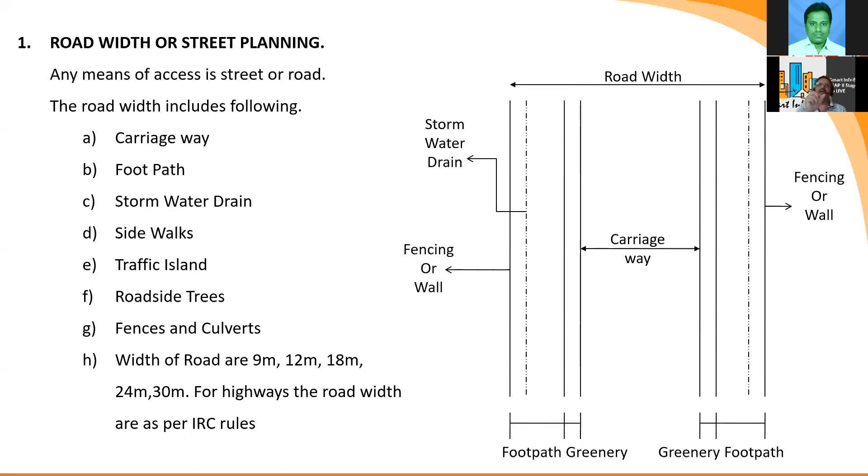And setbacks depend on this building height.

Any construction we do, buildings particularly, are for human occupancy. So air, lighting, ventilation, water, and circulation of fresh air are important. Particularly with COVID, we are getting design briefs from clients saying that we want to reduce the usage of air conditioning, so provide us natural cross ventilation in the building. Though it was there all along, now people are realizing the importance of natural ventilation and antibacterial finishes. These are all very important things for engineers to consider from now on.

The orientation of the building is important as light and ventilation play an important role in our health. Each state or community has its own orientation rules because as we go south, and as we go north, the climatic conditions are different. So we should follow orientation and planning depending on the region. If we go to the northeast, there is more rainfall always, so we have to plan preferably sloped roofs, considering more rainfall and sometimes even snowfall in some regions. Considering this climatic condition, we decide the orientation of the building and the building roof system.

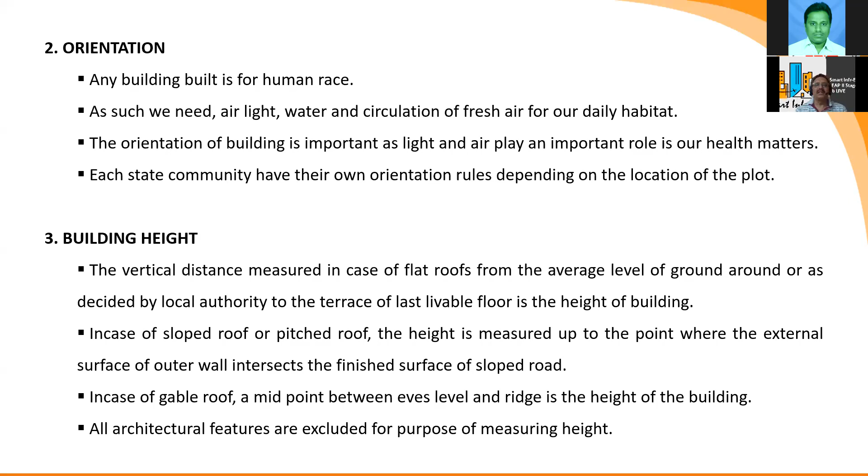All architectural features, that means parapet wall or facade, fascias, are all excluded from measuring the height. So this is the definition of building height.

And setbacks - setback is the distance between the property boundary and the building line. Somebody was asking me, in the setback, should we consider plaster, should we consider the balconies? Yes, definitely. So setback means it is a clear open space for the building.

So the next important thing is the floor area ratio. The definition of floor area ratio is the total covered area of all floors, excluding parking, excluding corridors, excluding balconies. It is called the floor area ratio - total covered area of all the floors, in other words, the plinth.

Let us take plinth area of the flats or commercial building and the total plot area. So if you have a FAR of 1.5, let's say in some corporations the limit of FAR is 1.5. If you have 1 acre of land, that is 43,560 square feet, with FAR 1.5 you add 43,560 plus 21,780, giving about 64,000 to 65,400 square feet as the built-up area you can build, plus common areas, balconies and all that.

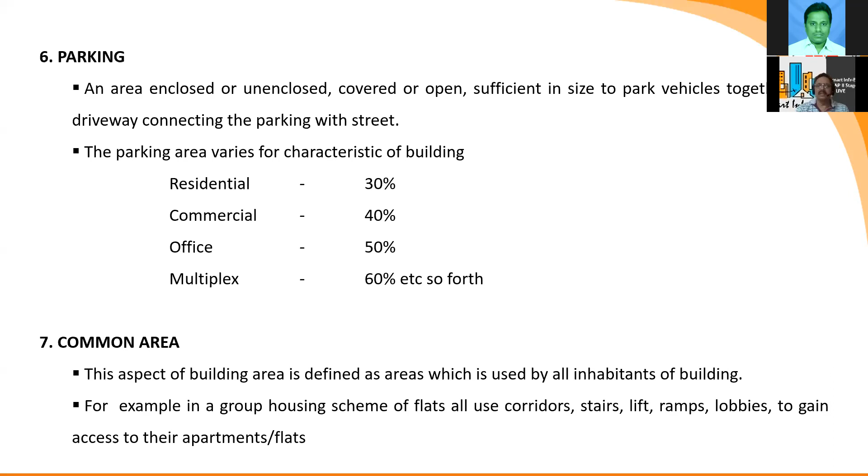But this 1 lakh square feet office space includes common areas, that is corridors, common lifts, elevators and escalators. The common area of each building type varies. For example, width of passage is 6 feet 6 inches for flats, about 2 meters, but for hospitals it is 10 feet, and in some larger areas we even provide 12 feet corridors. These are the bylaws.

Floor area ratio minimum starts with 1 in some areas, as per the bylaws, and goes up to 2 maximum. But in Telugu states, for example, there is no limit. I have come across in Kerala and Delhi certain provisions which allow up to 3 FAR also. So for every location of the building, we have to study the bylaws for that location.

Even in Hyderabad, we have different micro zones like Banjara Hills, with development control norms and regulations while giving permission for layout development. So for every area, we have to consider the DCR, development control regulations, or bylaws of that area. In Hyderabad itself we have HUDA, Hyderabad Urban Development Authority, HADA, Hyderabad Airport Development Authority, HMDA, Hyderabad Metropolitan Development Authority, and GHMC. So many regions have defined the DCR.

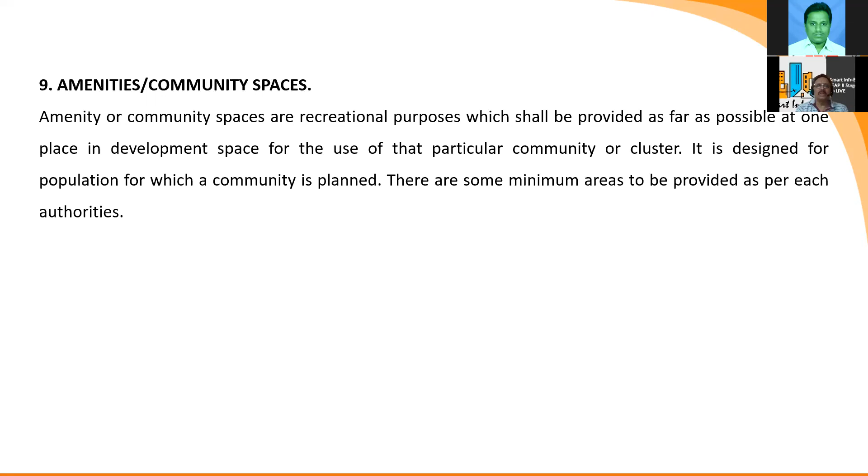For positioning and sizing, there are norms the National Building Code has defined for affordable housing also. So you have to refer to the NBC for the size of the rooms.

As per RERA, there is no restriction on limitation of common areas actually, but RERA only says you define the carpet area and you have to deliver that carpet area. You cannot reduce the carpet area that you define in your brochure. But for selling purposes, you can always discuss.

This is what I am trying to organize, to make developers follow a proper SOP. We have to educate both the people buying flats and those selling them, and discipline the sellers, because unless these two groups meet and agree, we cannot resolve this.

In fact, ideally, as an engineer, we always feel you can only measure the slab area. So measure the total slab area and divide by the number of flats, or divide with a weighted average of common areas. That should be the way we load the percentage of common area. But at present, this is not being followed strictly by everyone. Some bigger companies follow it, but down the line there is no transparency in declaring what the common area even is.

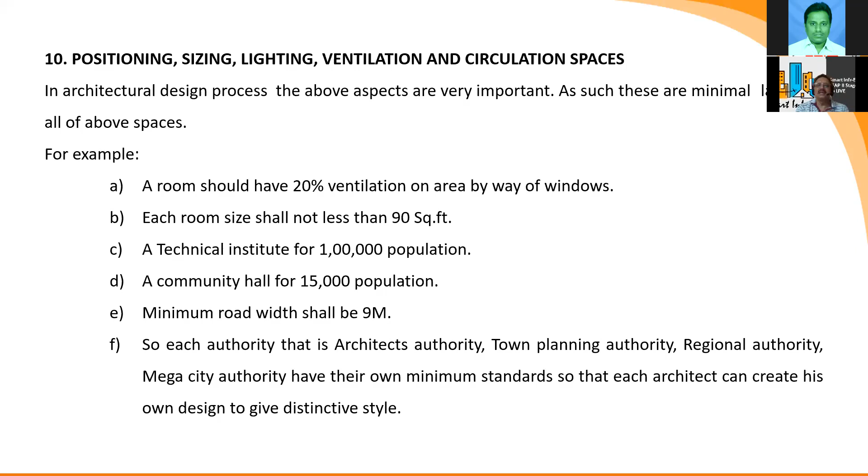Each room size should not be less than 90 square feet. In case of affordable housing, it is different. We have norms for a community hall for every 15,000 population, one technical institute for every 1 lakh population, and minimum road width shall be 9 meters. So this is the sizing of the plots and the sizing of the spaces.

Vastu, though many people think it's superstition, is in fact the civil engineering or architecture of those days, an ancient theory of planning and design of towns and even building planning. It gives certain discipline in planning and helps professionals reduce the number of options by following this theory. So it is sometimes good, we can follow or not follow, but it is an opportunity in planning to reduce the options for the designers.

And security, any building built is for securing from heat, rain, and personal security for his family. The security is now a subject in electronics, gadgets, and all that.

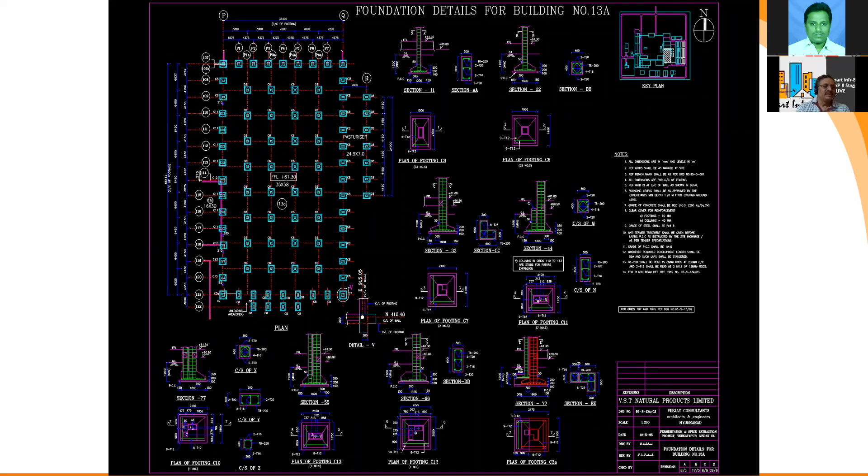This is one of the first few projects we have done, VST Natural Products in Jahirabad. This is another building plan, showing the foundations, and above the plinth, this is the plan, lintel layout and all that. I want to explain how clearly we plan the buildings for the specification.

Typical section: when you have the roof, you have the parapet, the roof, and the waterproofing or weathering course. You can see the 75 mm weathering course is there, and a PVC pipe for downtake. We have to plan the downtake for rainwater, which we have embedded in the column, and this is the column itself.

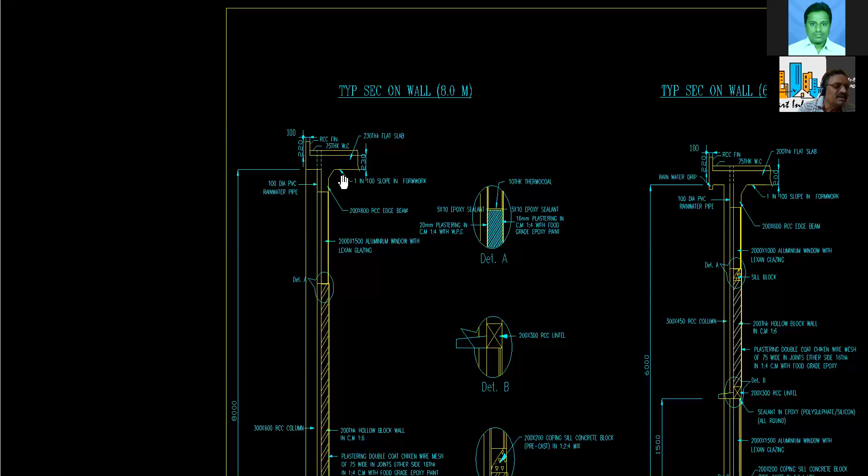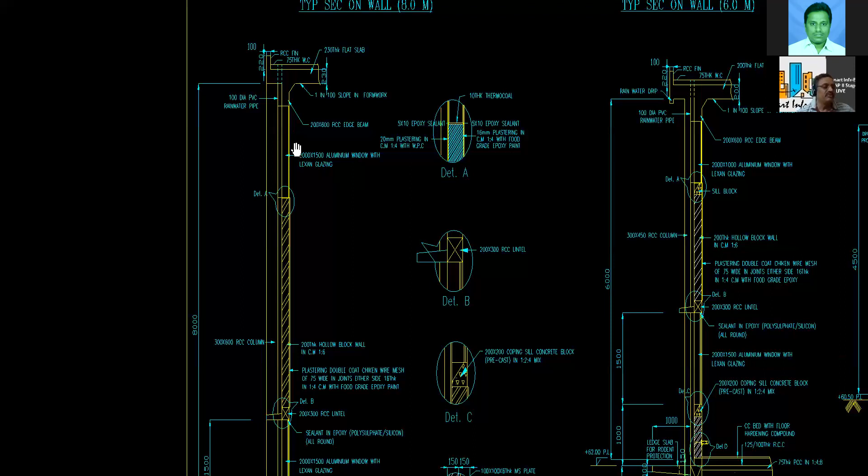So here we have the flat slab with the haunch, as per the FDA. We have the wall, and here you can see a 2000 by 1500 aluminum window with Lexan glazing. Lexan sheets are like GE sheets actually, so we use this. I've zoomed in, it's not going beyond this zoom.

You can see how detailed we give: 200 thick hollow block wall in cement mortar 1:6, and plastering double coat with chicken wire mesh 75 wide in joints, either side 16 mm thick in 1:4 cement mortar with food grade epoxy paint. Here you can see detail B, with sunshade sajja and lintel beam of 200 by 300, and then we have the sealant between the window frame and the lintel, epoxy polysulfide or silicon all around the window, and the 2000 by 1500 aluminum window with Lexan glazing.

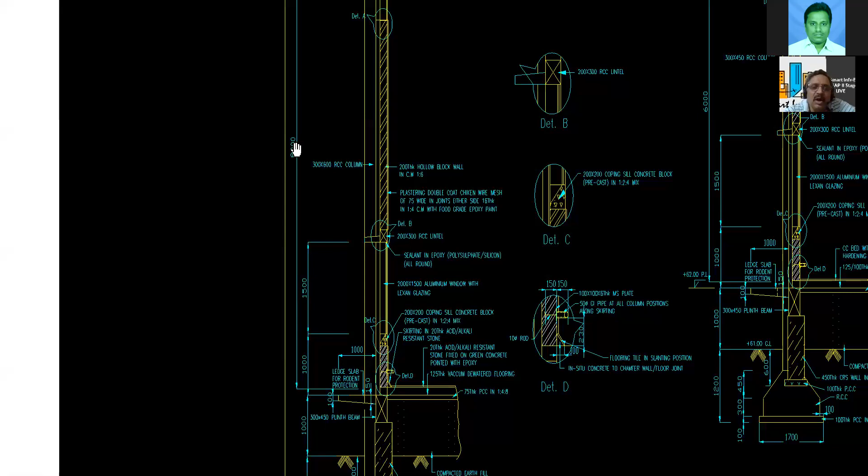And we have this sill block. Many people are missing this. Please read this: 200 by 200 with the coping sill block. I don't know whether it is visible here. Detail C you can see, so we are giving the slope here, and the window is fixed here. Then we have this sill block defined with the 1:2:4 mix, precast, those days. This is a 1995 drawing we made.

And skirting, here you can see skirting defined in the flooring, and then we have the flooring, 20 thick acid alkali resistant stone fixed on green concrete, pointed with epoxy. These tiles are pointed with epoxy. We tested this stone for acid alkali resistance and wear resistance, and we have a 125 thick vacuum dewatered flooring, and below that 75 thick PCC.

This is a food industry project, so we have this lipping slab or ledge slab, 1 meter from the plinth. You can see here the detail of this lipping slab projecting 1 meter from the plinth, for reptile protection and rat protection also.

Because this is a food industry, we don't want rats and reptiles entering through the window or anything. So this is the plinth wall, and compacted backfill here, and you have the plinth protection after the natural ground level or formed ground level, and we have the foundation with its size and all.

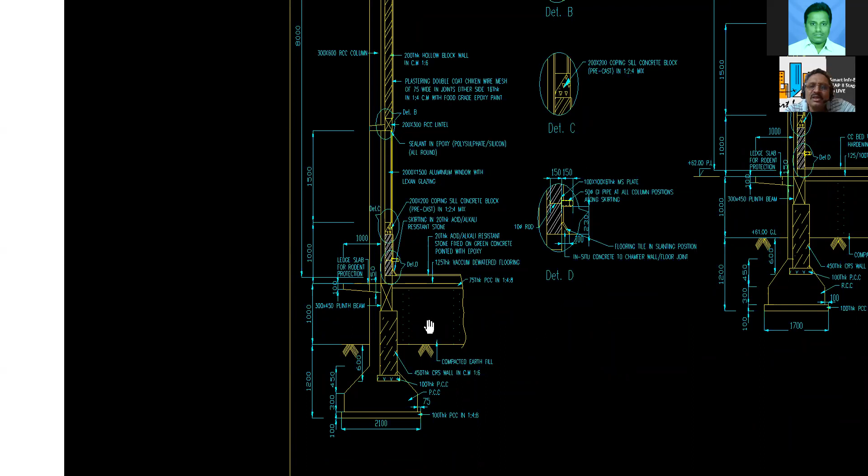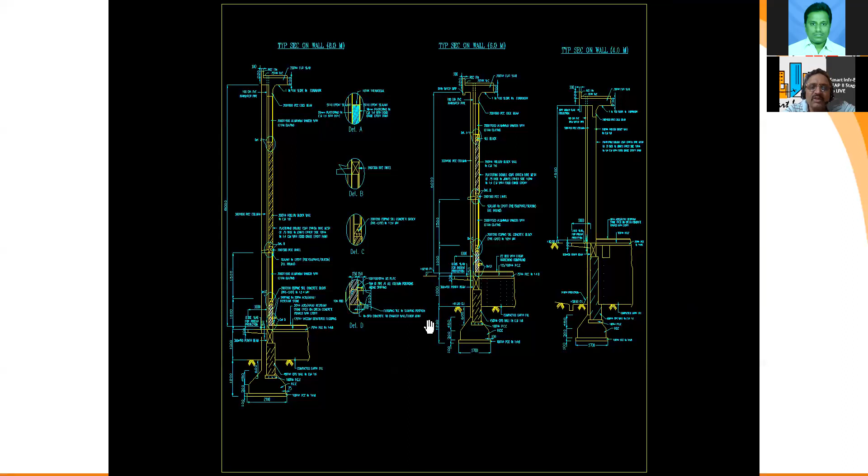So this is the level of detailing, just showing this for the sake of the detailing level. We have shown different cross sections of the building. It's always good to show all these details, lintel, coping on the sill block, and this is the ledge slab and all that.

So here you can see we are giving the drainage, stormwater drainage and plinth protection. This is very important for preventing any settlement in the foundations, and we even have to protect this plinth level filling from water ingress. So this is a very important plinth protection.

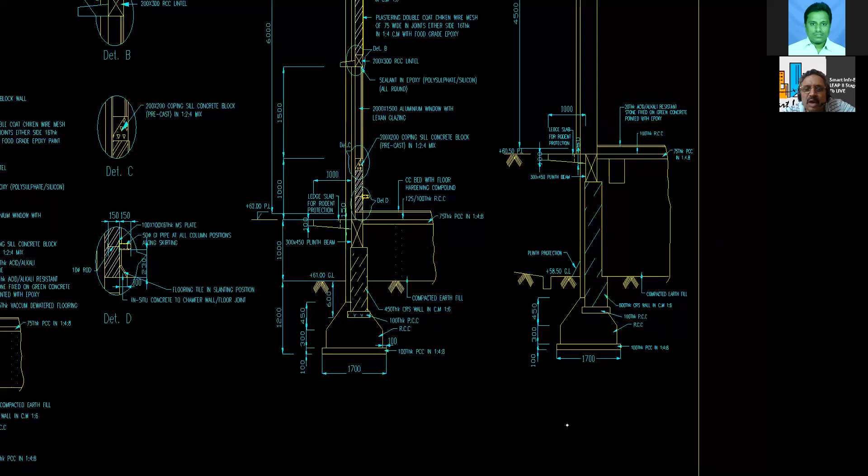We give up to 1 meter also, and then we provide the stormwater drain, because the downtakes that we provide in the columns or outside the column, we have to drain the water into this stormwater drain. So this is the level of detailing even in '95 we have done.

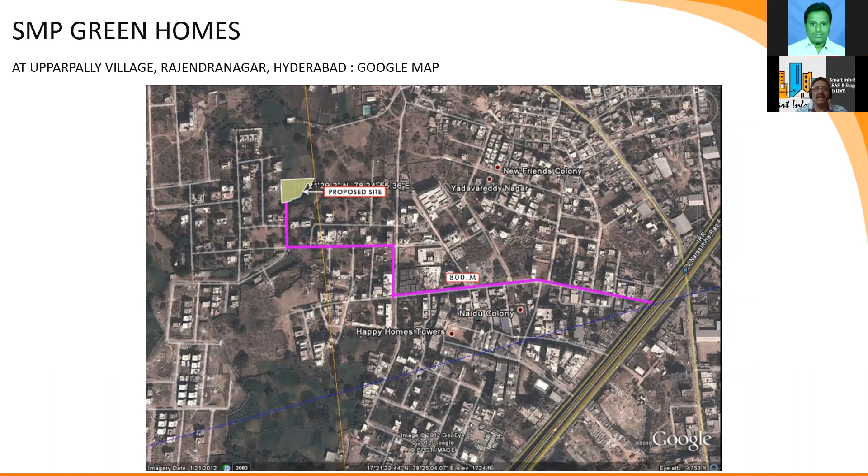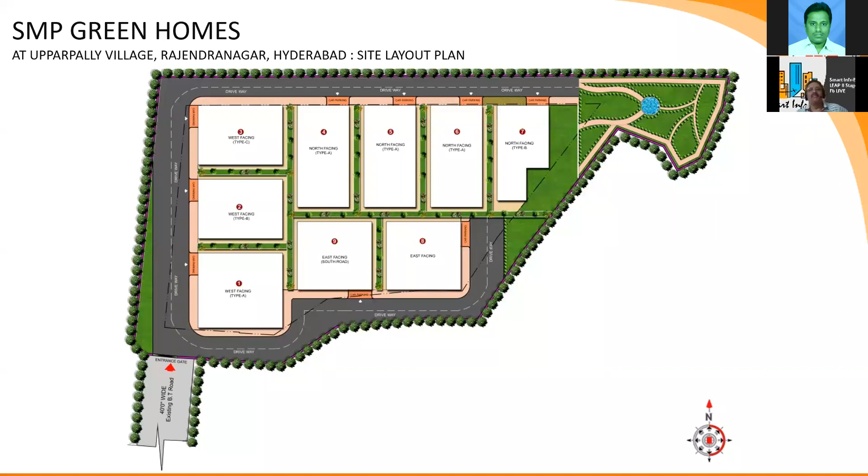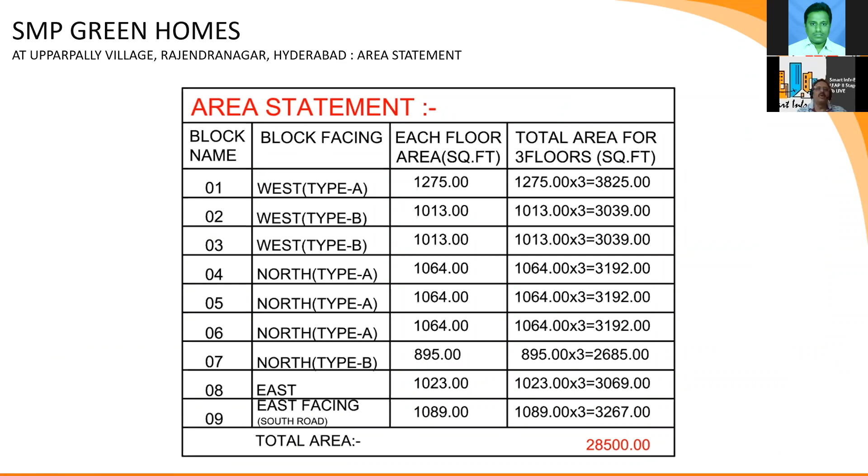That's the purpose of my talk, to enlighten people about the importance of detailing and specification. If you see all my lectures, I am trying to highlight the importance of understanding the design intent of the client and preparing the design basis report based on that intent, then planning as per the norms. As professionals, we should not deviate from the guidelines, because we want to protect the safety and living standards of the people.

This is our objective as a professional, so we should work with that. Don't worry about your earnings. As you keep doing this, you will automatically become a better professional, and people definitely need better professionals. We are moving towards a better, transparent professional life, definitely. RERA is one of the reasons for that, and the engineers bill we are trying for is another reason.

So every engineer should be aware - I have given construction supervision SOPs, planning SOPs, now design, we have covered structural design, construction technologies, construction engineering. I feel that whatever 57 lectures I'm giving in this LEAP series are all important for every engineer. So if you have missed some of them, even if it is irrigation, we are supposed to be aware of it. That's why I'm covering all the topics. Please listen to them also.

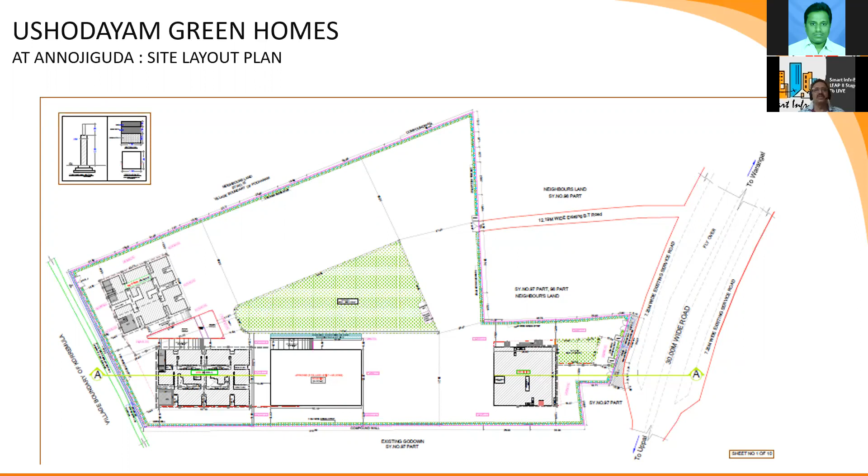For taking permission, the limitation without pollution control NOC is 20,000 square meters. This is a central government norm. From 20,000 square meters up to 1,50,000 square meters, you can get pollution control NOC from the state level itself. If any construction area goes beyond 1,50,000 square meters, you should go for Ministry of Environment and Forest clearance.

So this is the planning of a residential building where you can see the corridors. Here you will see all this complexity because of the east-west facing. All the flats are east-west facing. You can see opposite doors. So this is for the Vastu compliance, and we have fire escape staircases here, 3 staircases and 4 lifts. We have all this, and we have greenery within this also, courtyard also.

And this is the 3 meters clear distance here or here, because any open space should have minimum 3 meter dimension or 10 feet. So that's why you see this distance. And here we have planned common wall for the sake of structural efficiency and all.

Here, this is a planning we did with the most efficient circulation and most efficient structural system. And we could save steel and concrete a lot. And here we have used the aluminum engineered shuttering actually. So we have considered the shear walls because it is a 15-story plus 3-story parking.

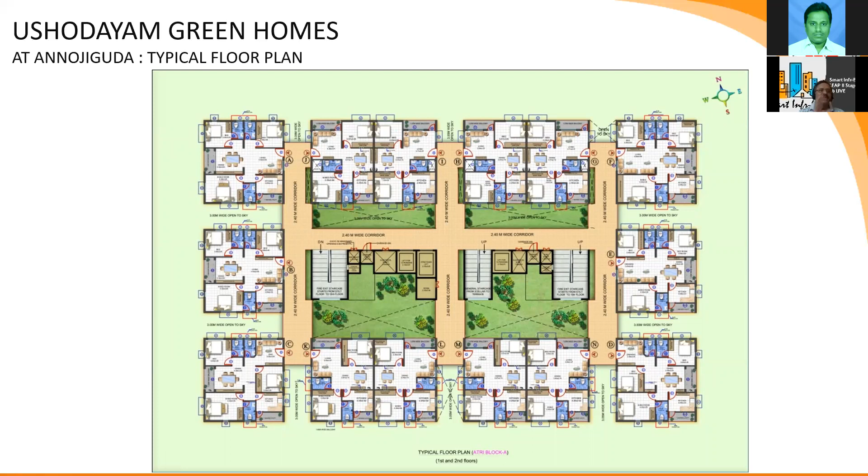So this is the plan of a building which we have done. And this is the entire block typical floor plan, ground floor plan. And you know, particularly when you have high-rise buildings, fire setbacks are followed, you cannot have the projection beyond this building line in the ground and first floor. So your plans will be different for ground and first floor and above the first floor. So that's why I'm showing this.

And government is doing this affordable housing now. But we know, in fact, we all professionals and developers are responsible for whatever slums we are having, bastis we are having in cities. Because every one of us want a servant maid, a driver, a helper, and all that near our house, to stay near our house. But we don't plan housing for them.

And these working class are the people who cannot afford to travel long distances because they spend more time. If we work for 8 hours, let us say, my driver has to work for 10 hours. If I work for 10 hours, my driver has to work for 12 hours. So definitely we as professionals should think of housing for them. So that's why I always talk about the importance of affordable housing in the near vicinity of any development.

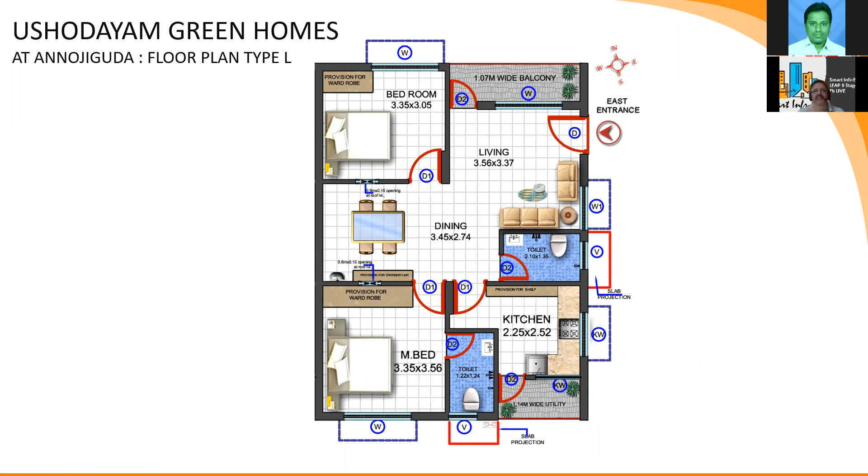We have to minimize the circulation space in any planning. So then if you really minimize the circulation area, people will feel it is a bigger flat than what we are offering. So it's very important in planning to give more efficiency in the planning.

So this is the 10 acres master plan that we have done with a clubhouse in between, and these are the 15-story residential apartments.

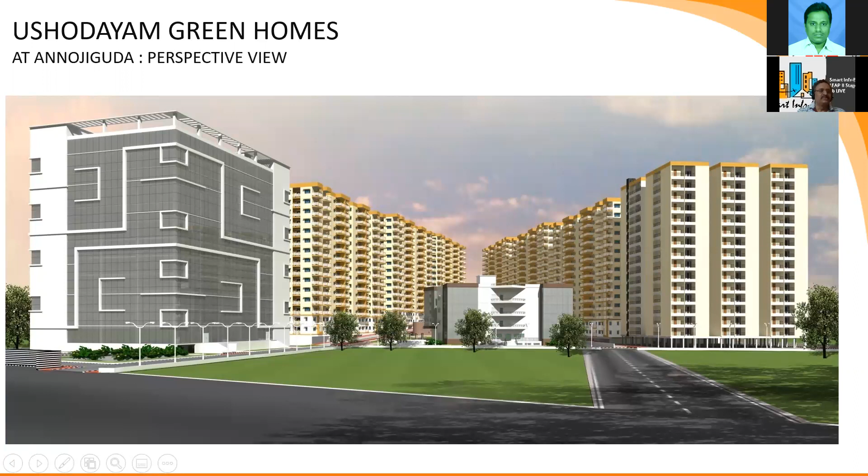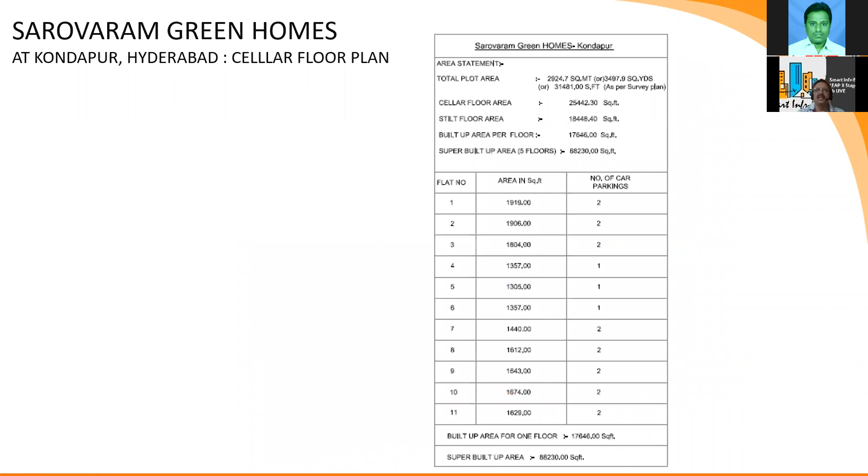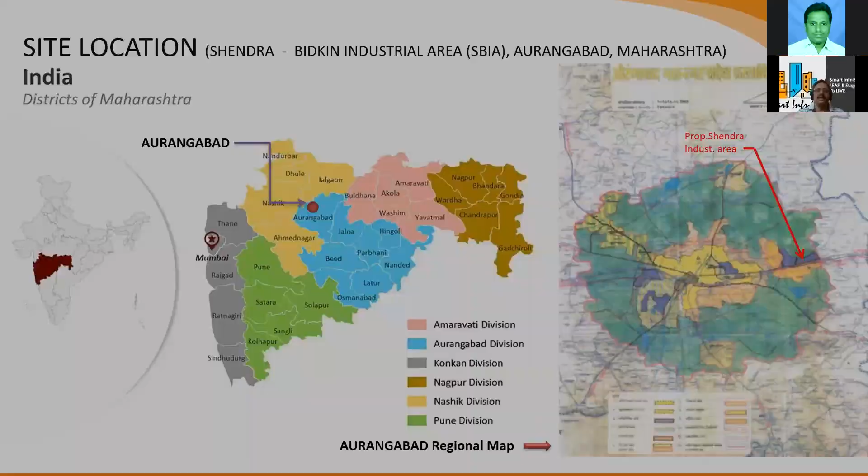And another central business district, we have done planning. And so this is the site context. I'll not go into the details of the CBD planning. Here you can see this is the CBD area. So this is 50 acres and a total of 8.39 square kilometers industrial layout, for which we planned the central business district. So master planning, this comes under master planning.

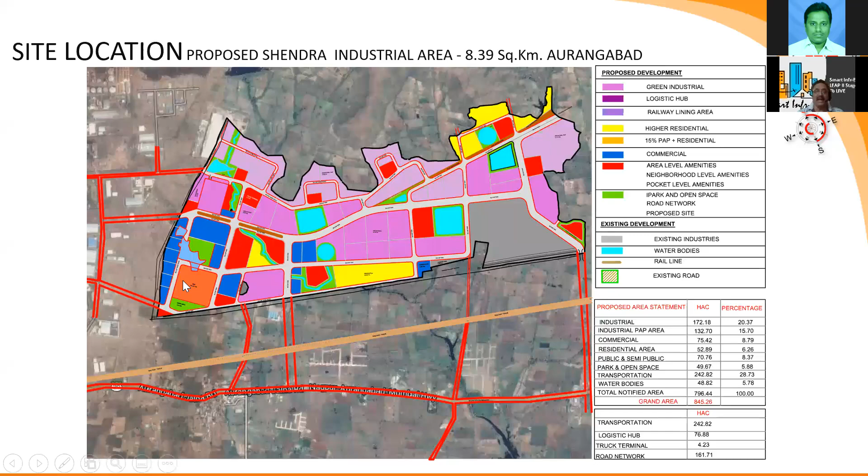So we study the location connectivity. You can see here in the layout, regional connectivity, state highway, national highway, railway line, proposed connecting roads within the layout development and all that.

So this is the master plan presentation I'm sharing with you. For planning, we have to see the employment opportunities that can arise out of this development, and who are all the possible developers.

And here is the site context. We are doing the contour study and the proposed roads that we have planned. And here you can see the railway line and all that.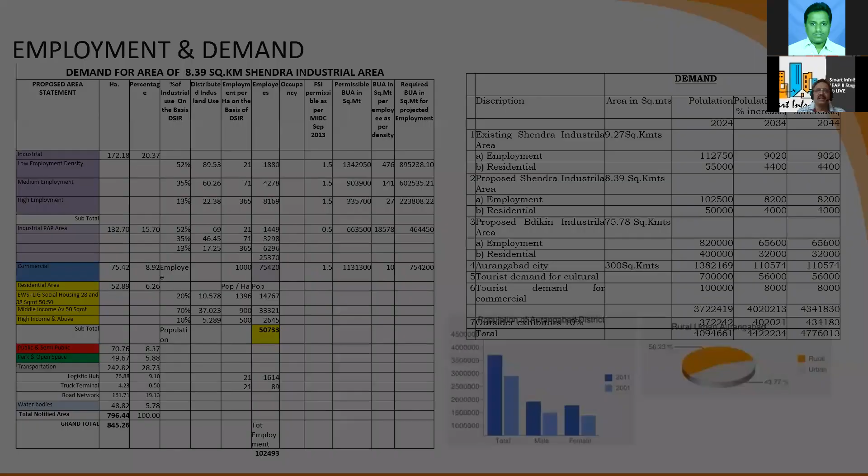We have studied employment demand, because we have to understand the demand that can arise out of that location. So we have done the CBD projects, similar projects that are developed and how they have grown, and we have to draw inspiration from that.

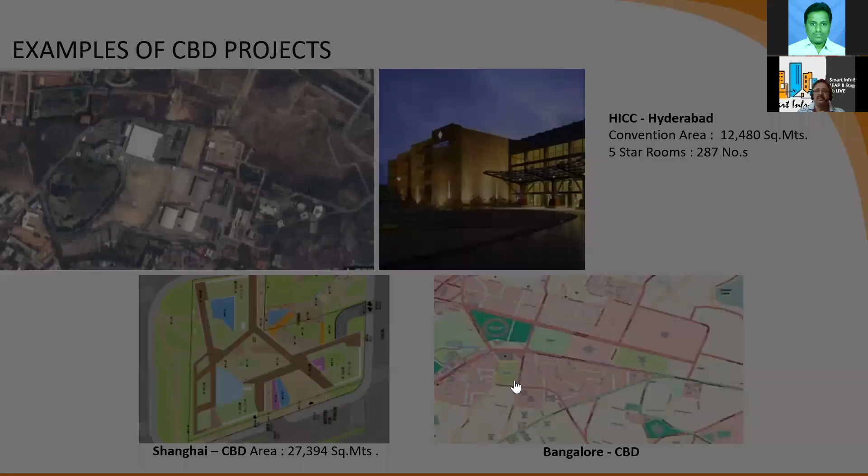So we have studied Shanghai, Hyderabad HICC, and Bangalore CBD also. And these are all the different CBDs, even Odisha, Coimbatore - we have studied their planning and growth, how it is done.

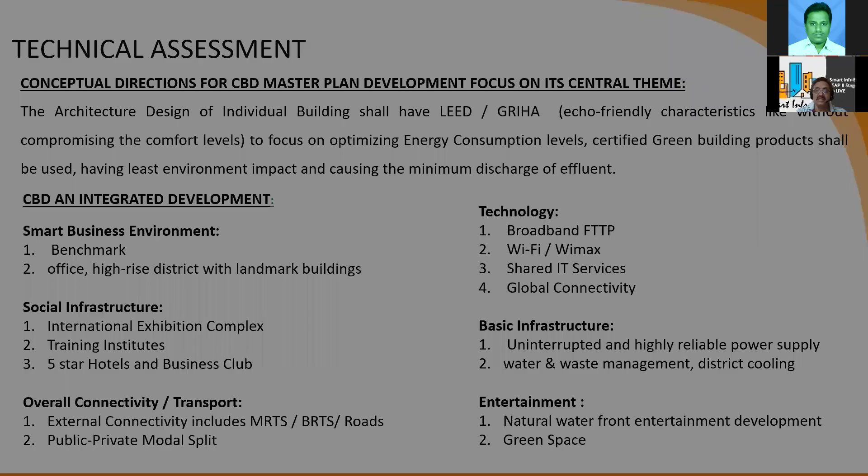So technical assessment we do, and I'll not spend much time on this exhibition, and all the components of the central business district. We plan and design the composition of this CBD, and we do the technical assessment and transport vision, how it is to be connected, parking connecting to the highways, water treatment and water source, and sewage treatment and disposal of waste in the master plan. We will be doing all this.

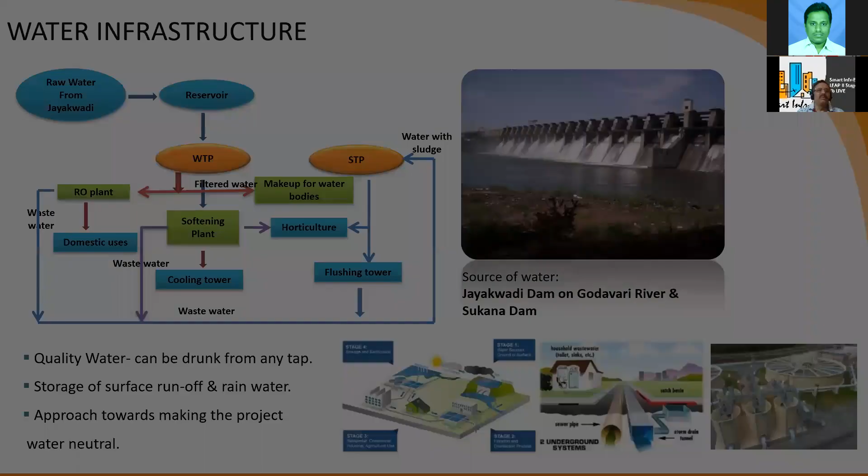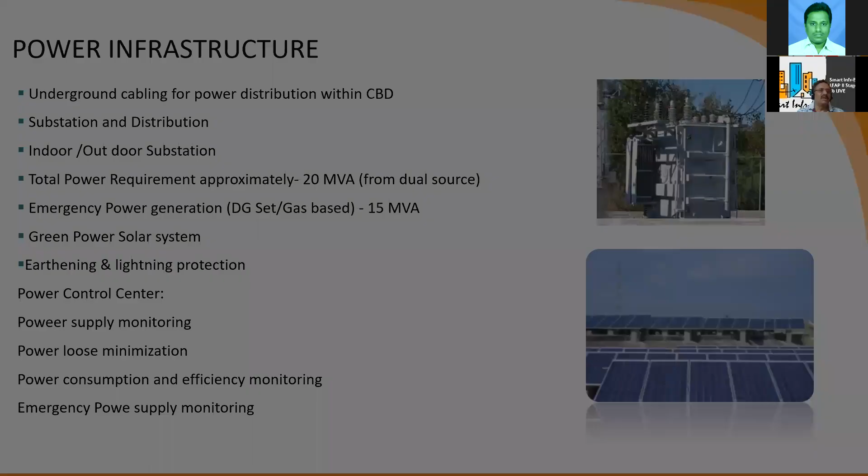And district cooling system for air conditioning for large areas, we plan the district cooling systems. And power and infrastructure, sources of power, what will be the power demand for such development, fire safety measures, and central command and control. Nowadays for security reasons, we have to design the central command for the entire 8.39 square kilometers I am talking about.

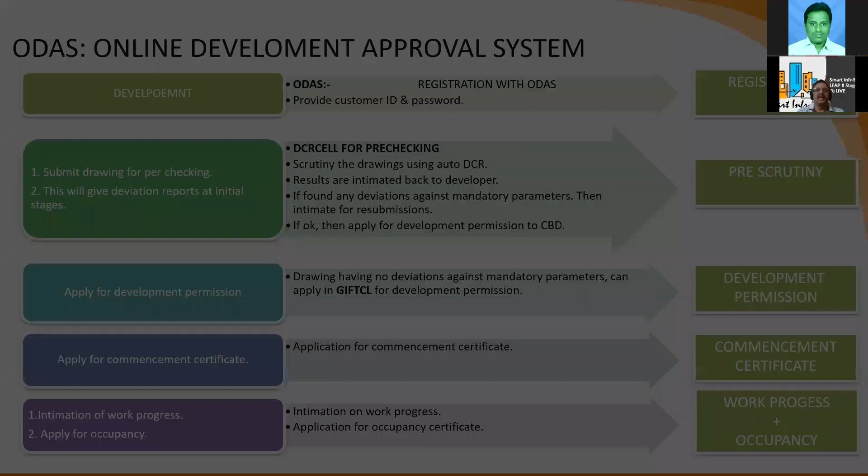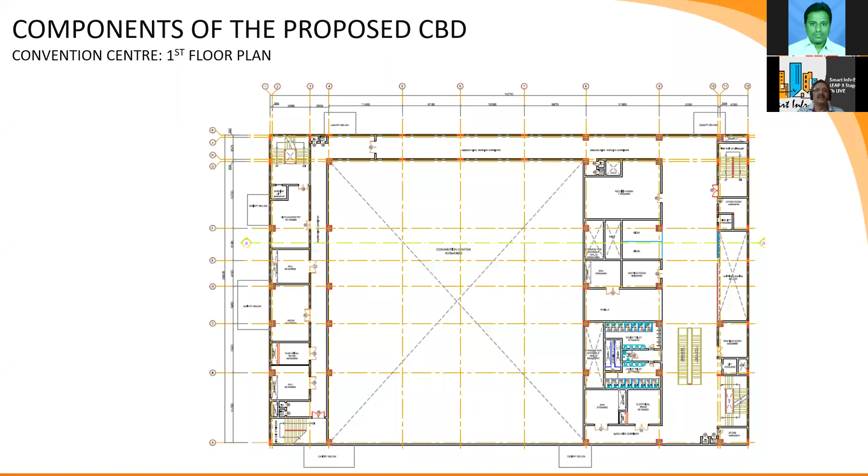And then we planned this exhibition center, and we have planned the site layout, parking, everything for that. And this is the seating of the convention center. This is the convention center we have planned. So this is the convention center.

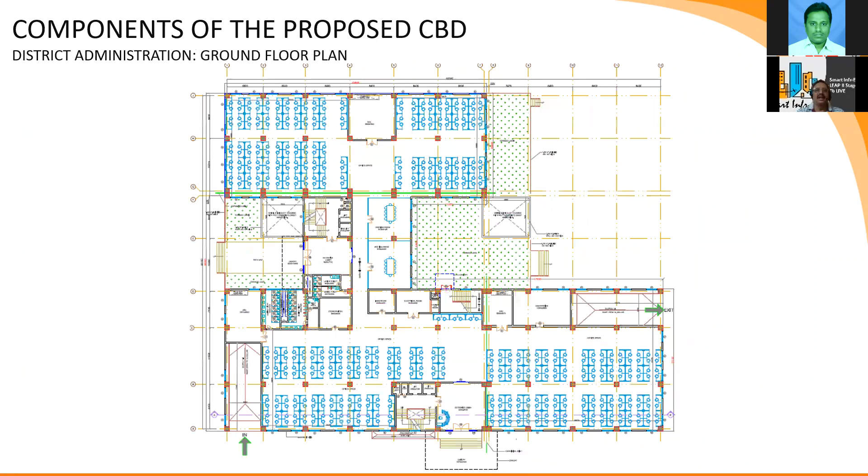And then parking for the convention center. And this is the administration building in that area.

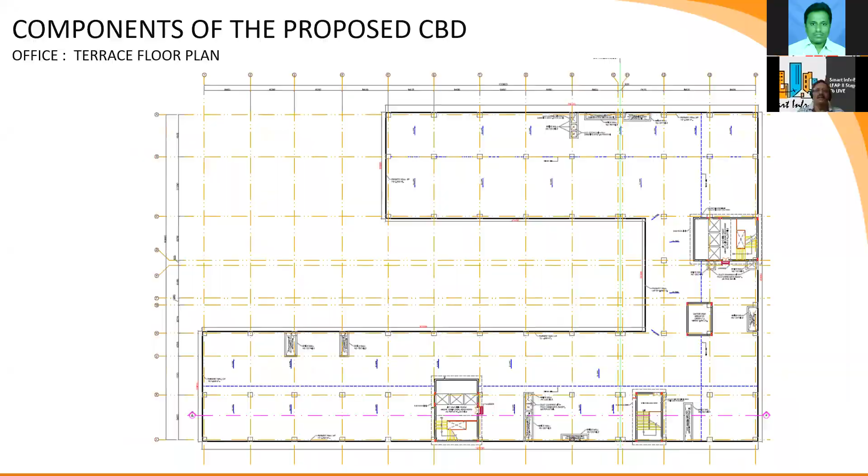Time is limited, so I'll just show you so many planning components are involved in the master plan. Though this may not be directly used for deciding in the master plan, we decide the development control regulation, and we take the permission for this. And this is the iconic tower which we have designed, and hotel example and service apartments - all this is part of the approach towards master planning.

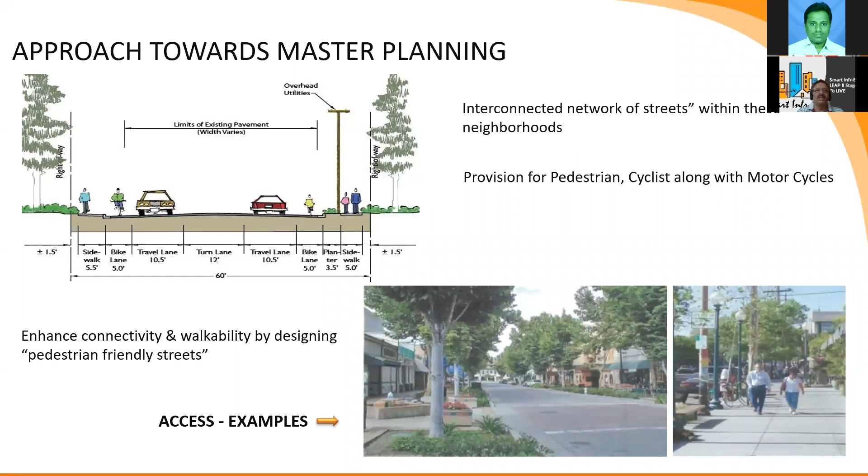Again, this is the ventilation and lighting, how we consider it, and heterogeneous development examples we have studied. And this is the avenues like streets, how they look like. So in the master plan, we consider this also.

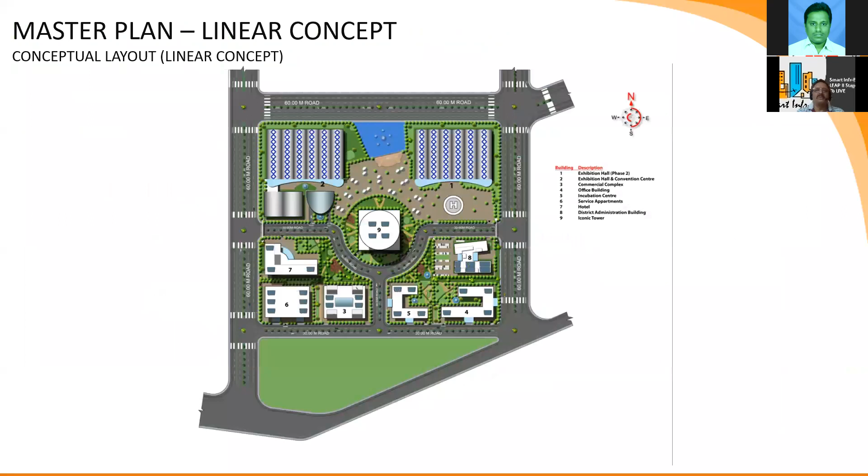And aesthetic examples, and this is the different master plan options that are there. And this is the final master plan that we have presented, with ground coverage and FAR limitations and all.

And mechanical, electrical, firefighting - all are shown in this master plan. Heat load and electrical planning and building design. And architectural, structural - we have to plan all this structural system, wind loads, earthquake loads, load combinations, and structural systems.

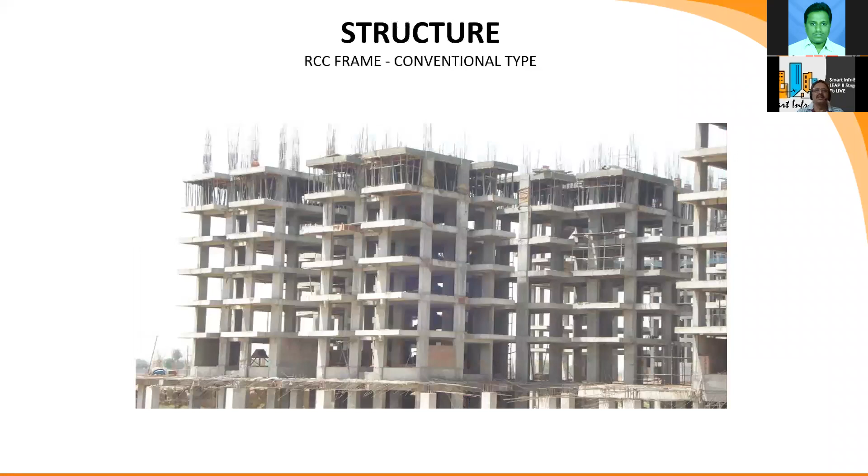We have to consider framed structures, wooden structure, concrete structure, RCC pre-stressed concrete, and steel frames. So these are all the options that we can consider, and we should always do value engineering while we are deciding the structural system and the materials.

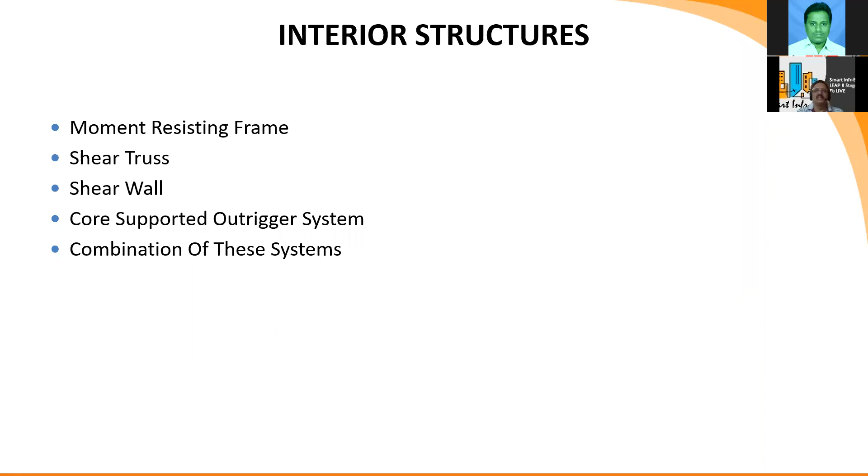Loads, types of loads, arches, and load-bearing wall - this is for simple buildings. You can still go for load-bearing wall with the slab and interior structures. So this I have covered in the structural systems.

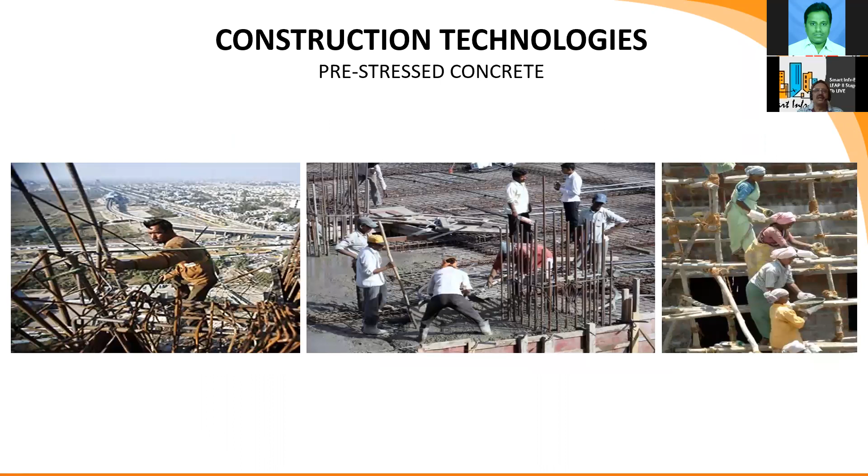I'll not go into construction technologies and all that. We have this for large-scale constructions. We have to do this value engineering even for construction technologies in combination with the structural systems, and shear wall systems with base isolation, rigid frame.

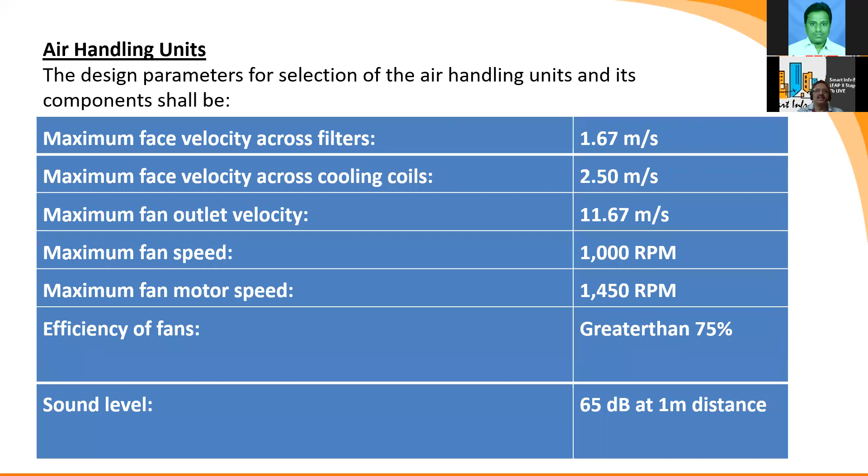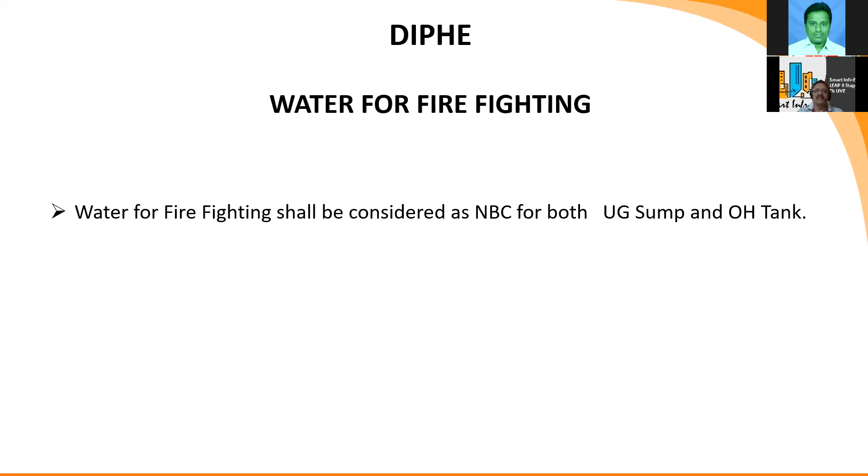And this is another project we did, a housing project. I'm only presenting the presentation we did for a design competition, and we won the design out of 9 participants in this competition. We were rated the best. That's why I'm sharing this planning.

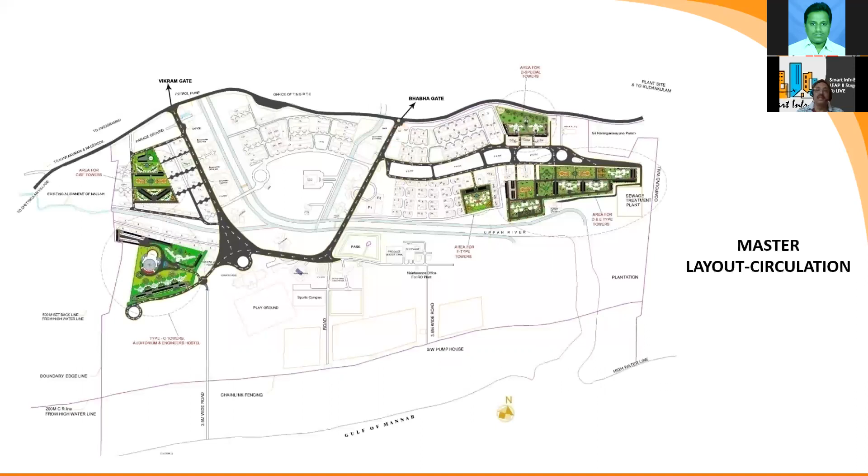Though we didn't get this job because commercially we were higher, I'm still sharing the planning aspects because we are rated the best in ventilation, lighting, and circulation spaces. This is the township where we have planned very efficiently, and you can see this planning.

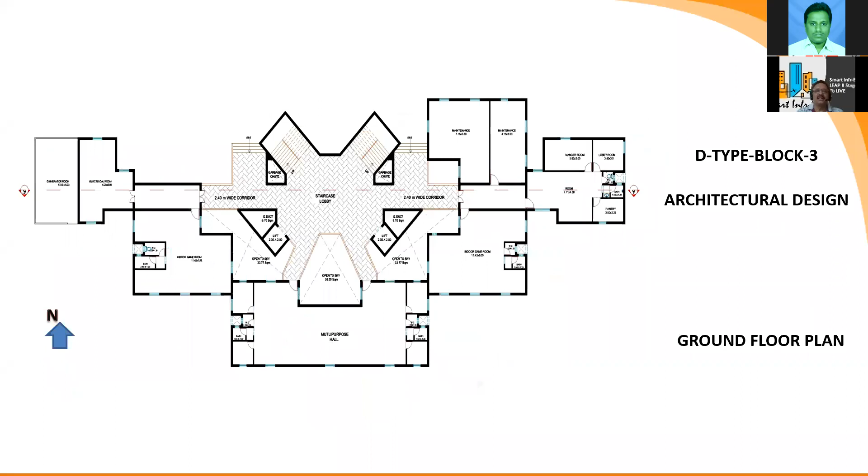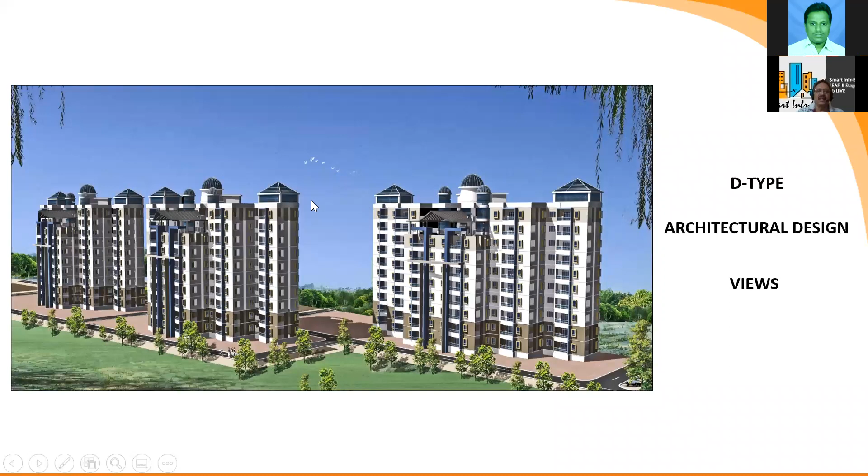So many residential towers, even using the concept of pyramid and dome, because it's a nuclear power township. We used the domes because when you think of a nuclear plant, you think of the dome. The pyramid represents energy. That's how we used these elements, and the whole township is planned considering these domes and pyramids.

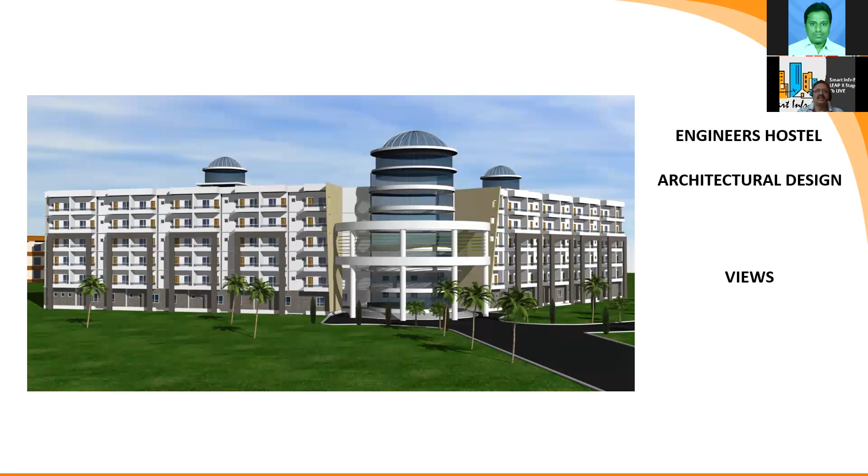And this is the planning of the buildings. I'll go to these open spaces and the ventilation, how we have planned them. This is the hostel building, and this is the auditorium we have planned, with these domes considered.

Dome is a common element and design concept, based on client's requirements, climatic design, land and built environment, architectural features, circulation, natural light, and cross ventilation. So client's requirements we have considered.

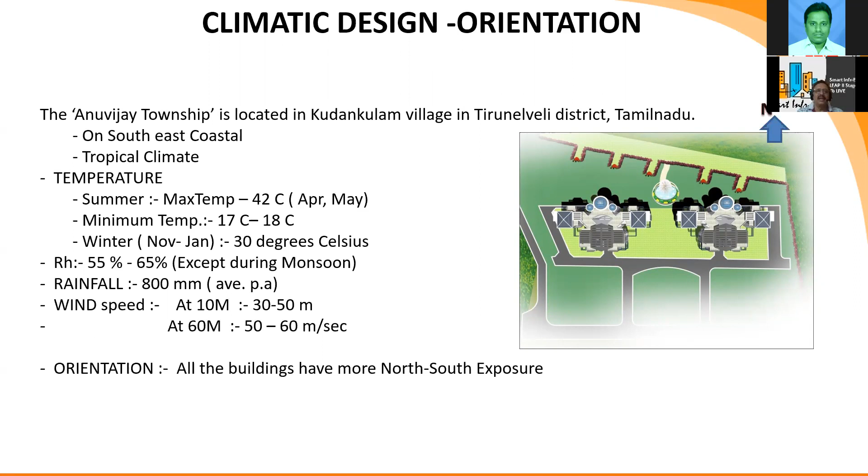The maximum temperature was 42 degrees, minimum temperature is 17 degrees, and winter is 30 degrees. Relative humidity is 55%, which is important when we design air conditioning and ventilation, and rainfall is 800mm average here. The wind speed varies from 30 to 50 meters per second at 10 meter height, and 50 to 60 meters per second at 60 meter height.

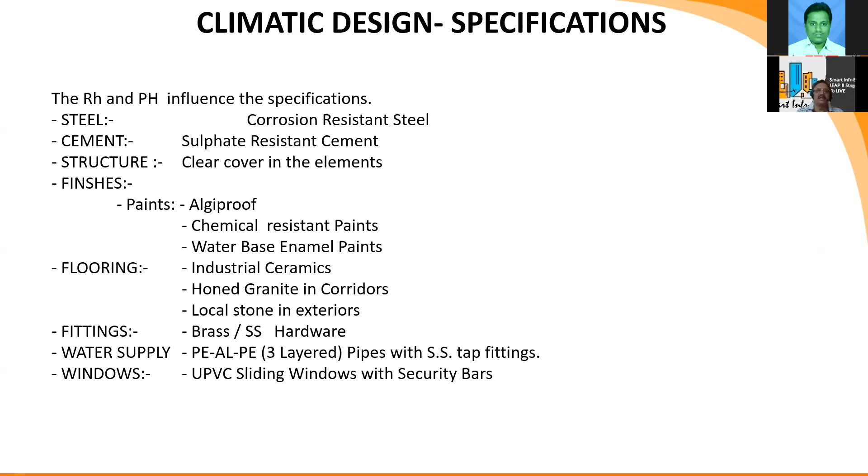Because it's a sea coast, we proposed corrosion resistant steel and sulfate resistant cement in the concrete, with appropriate clear cover. Depending on this, we considered moderate exposure condition for the clear cover, and we have specified finishes accordingly.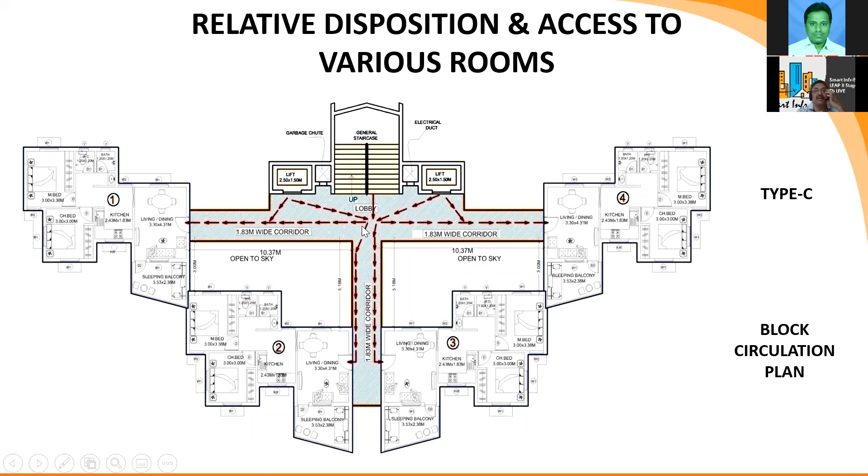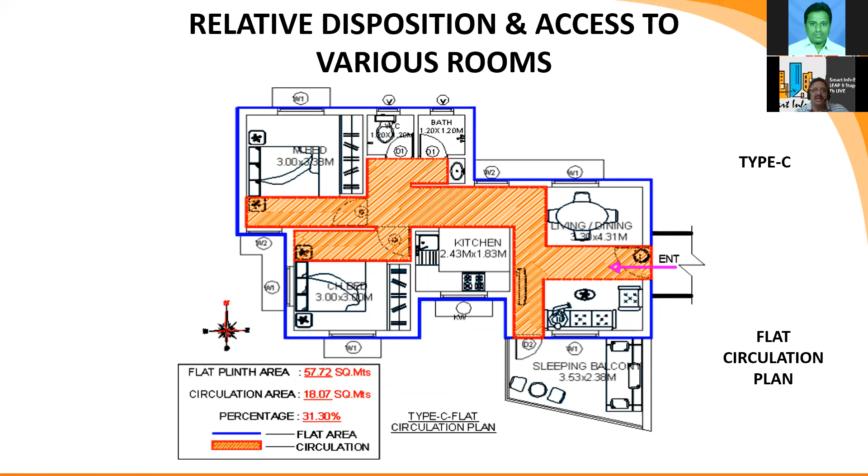This is the circulation space, the relative disposition within the flat. Once you reach the flat, what is the total circulation area you have? We calculated the percentage of circulation area to be 31%. This is very important to minimize in the planning of any apartment.

This is access to various apartments, and this is another circulation area, here for higher executives. This is another internal layout. For each dwelling unit, here you can see 27% circulation. So if you go for a bigger apartment, you get lesser circulation space.

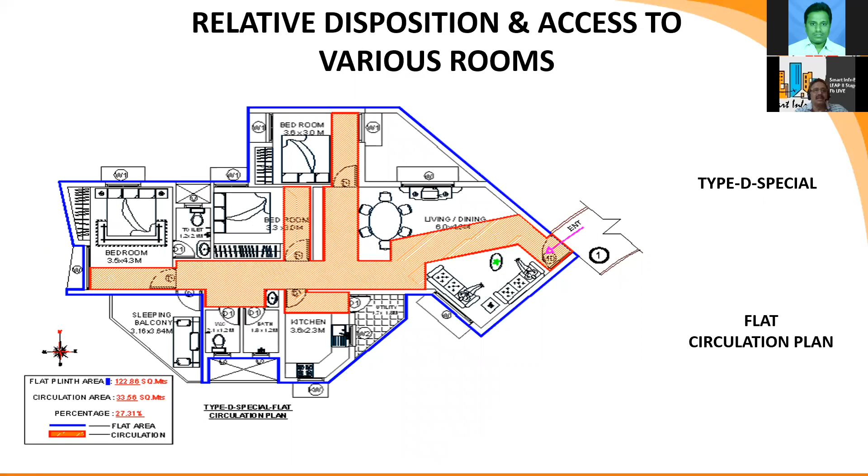We have not calculated the circulation distance here. Here you can see another disposition of the apartment and access corridor. Here it is 27% relative disposition and common area circulation space. So these are all the different circulation spaces we have planned.

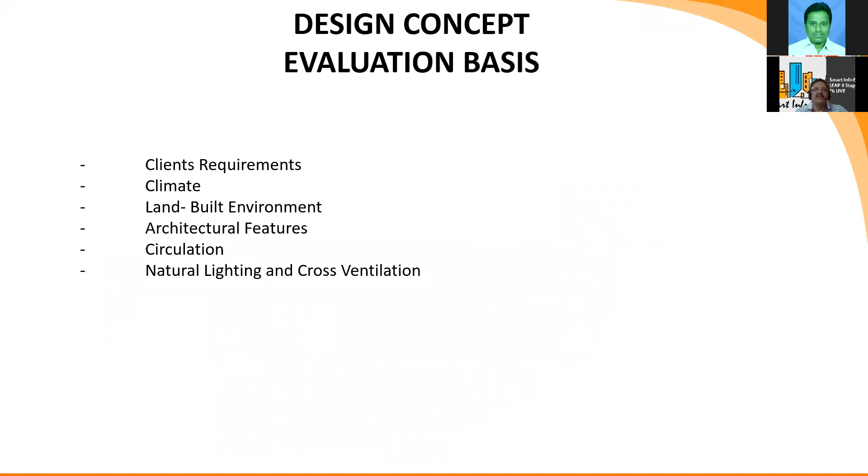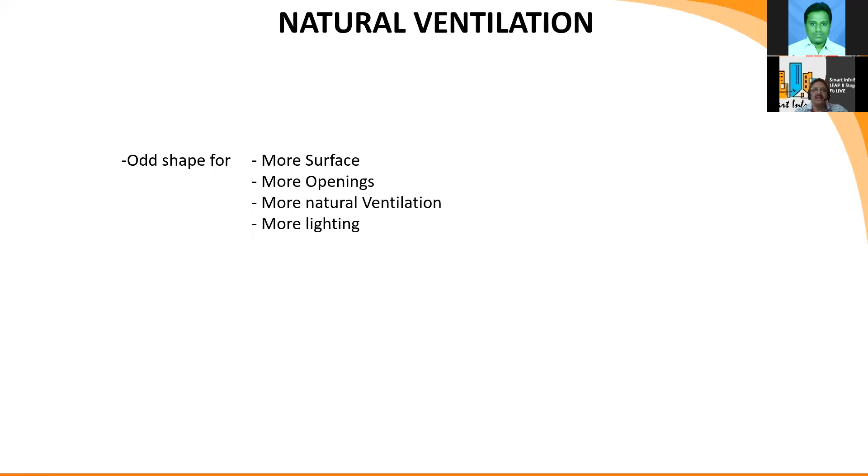So we use an odd shape for more surface, more openings, and more natural ventilation. We are just explaining the natural ventilation concept. Every room should have a minimum of 2 openings other than the door. That's the concept we are trying to explain here.

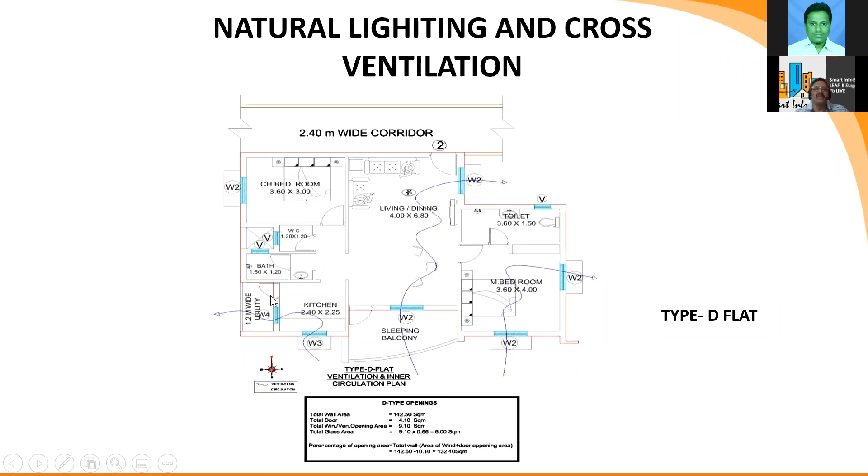For the ventilation, here for every unit we are showing the cross ventilation. For every room, you have to plan the cross ventilation, which is very important. So these are the cross ventilation drawings we are showing, and you can see the cross ventilation for every room here.

So plinth area, wall area with respect to plinth area. This is showing the efficiency. It should be less than 15%, that is carpet area versus plinth area. So this is what we have shown for each of the plannings we did, the percentage of wall area.

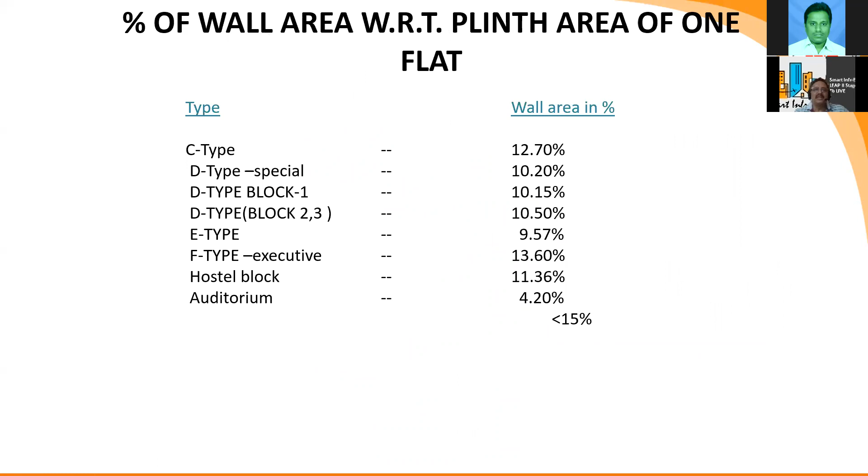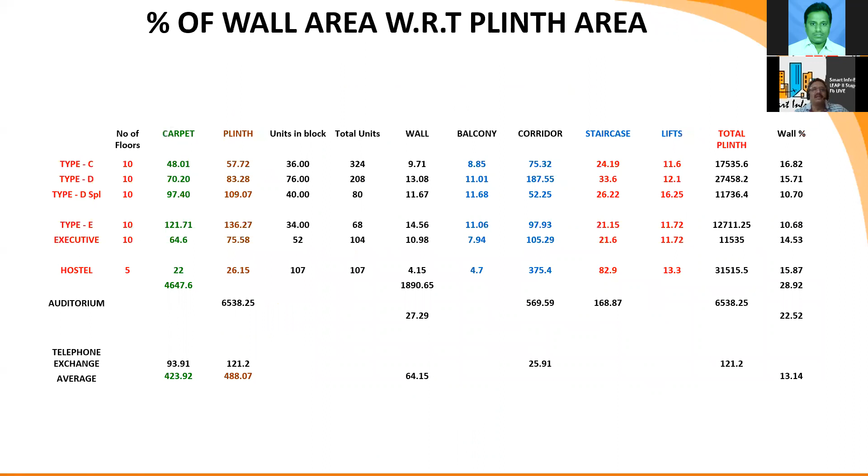And the floor space index, we have limited to 2 here. You can see total floor space index, and these are the wall area versus plinth area total calculations. And the bylaws, maximum permissible floor space index, and then balcony with the sleeping arrangement they wanted.

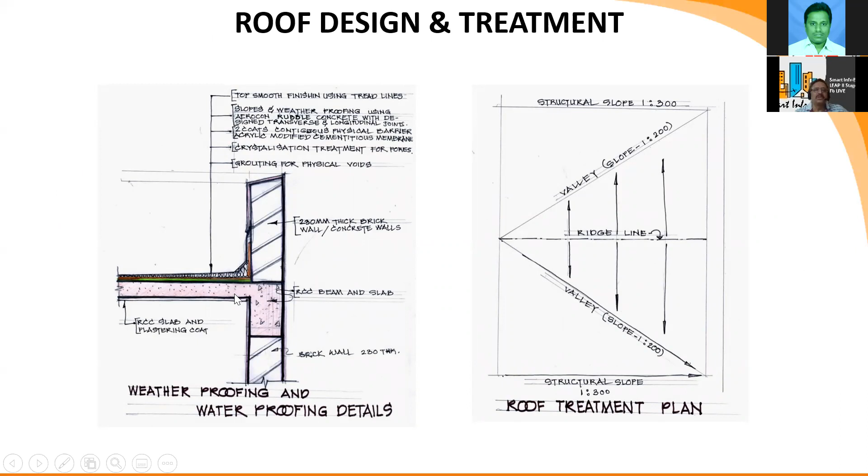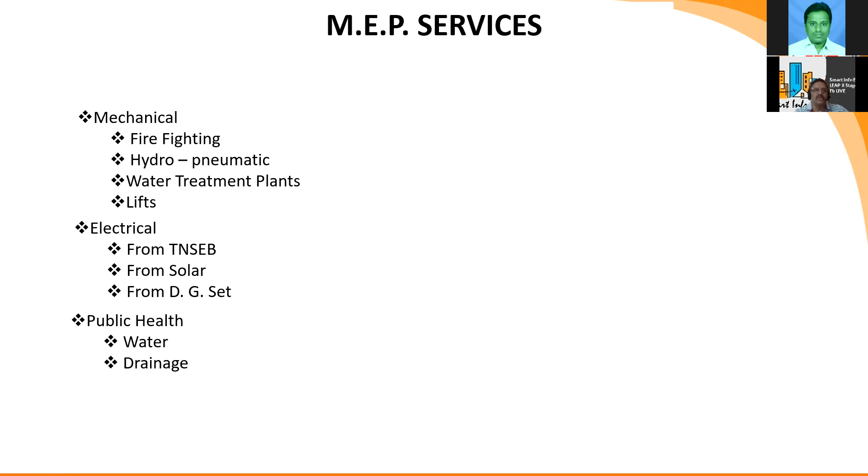And firefighting, hydro-pneumatic water supply system, water treatment plant, and elevators, electrical from TNSEB. This is Kudankulam, Tamil Nadu. So the DG set backup, and water and drainage in public health, firefighting, fire hydrant, fire alarm, hydro-pneumatic for raw water and recycled water, and water treatment plants, softener, water softener.

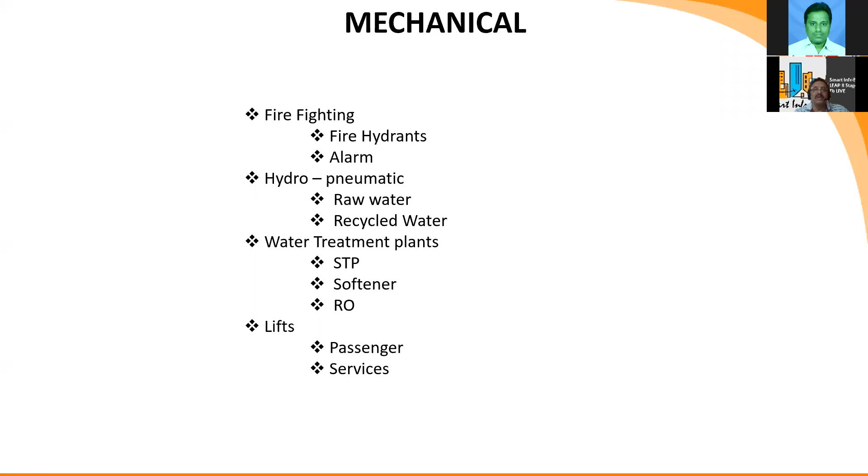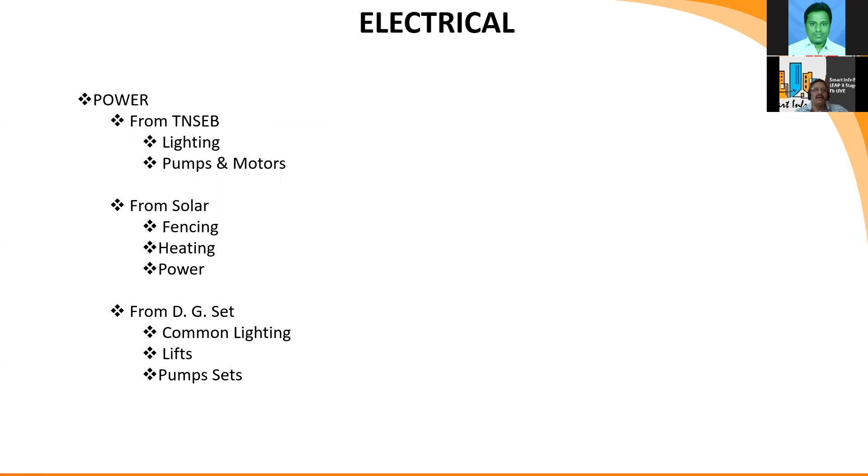So power requirements, we also define all these things. So this is all about planning and design of the buildings. So if anybody, one of you have doubts, you can ask me now.